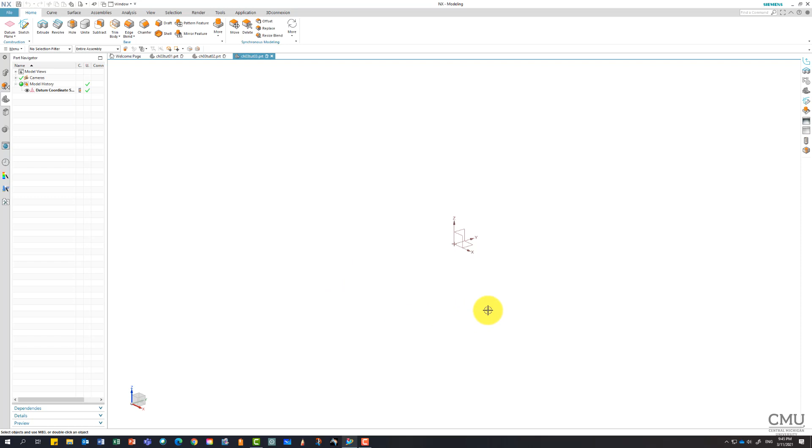According to the book, this looks like a chess piece, so we need to do a different operation. Extrusion is definitely not what we need. This time we're going to use revolve. We're going to make a sketch and rotate it based on an axis. So either using the XZ plane or YZ plane, you can make a sketch, then you'll be able to revolve it.

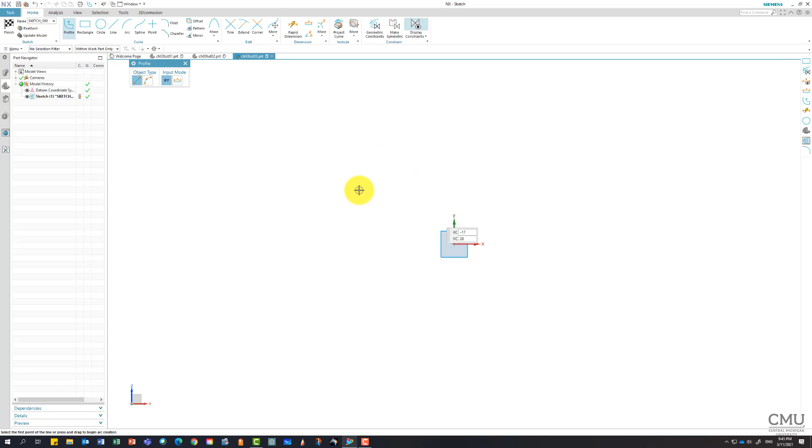Let me use the XZ plane for the sketch. There you go. I'm going to use the center as the sketch origin. Once I finish it, then I'm going to revolve it. The overall diameter is 120, so I need to go around 60. So always think about the diameter, but we're going to work on the radius in the profile.

Let me zoom in a little bit so I can get more detail, and I'm panning a little bit. Alright, starting from there, then I'm going to go around 60.

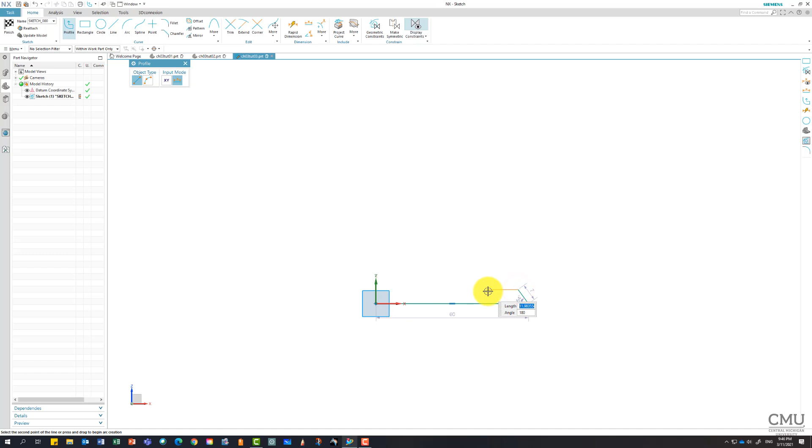There we go, then a little bit of a diagonal line, a little bit of a horizontal line. Again, just work it out over, get the overall shape. It kind of works out, but try not to have unintentional constraints.

So now line it up, then come back. So I got the overall shape. Obviously this is not exactly what we needed.

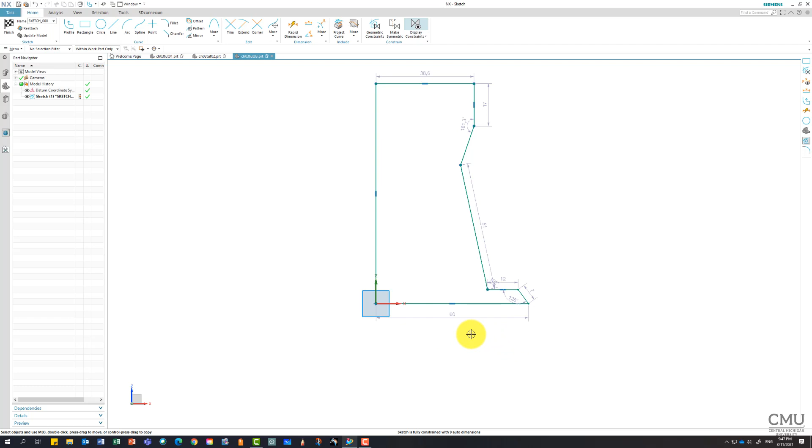So I'm going to start adding some more dimensions or constraints. Let's start thinking about some constraints we need. Actually there's not much going on. So we have a horizontal, vertical - besides that, most of them should be done by dimensions. That's pretty much it.

Let's start with the dimensions then. Our dimensions are from the center. Let me change it to inferred so that I can pick up an object and automatically find the best dimension to fit it into.

I'm going to start with the bottom, all the way going up. So 120 diameter here, so obviously they need to be 60. So from there to there, it's got to be 60. Can confirm 60, enter, it's confirmed.

Another one is 80 in diameter, so from there to there needs to be 40. From there to there, as 40, confirm 40, enter.

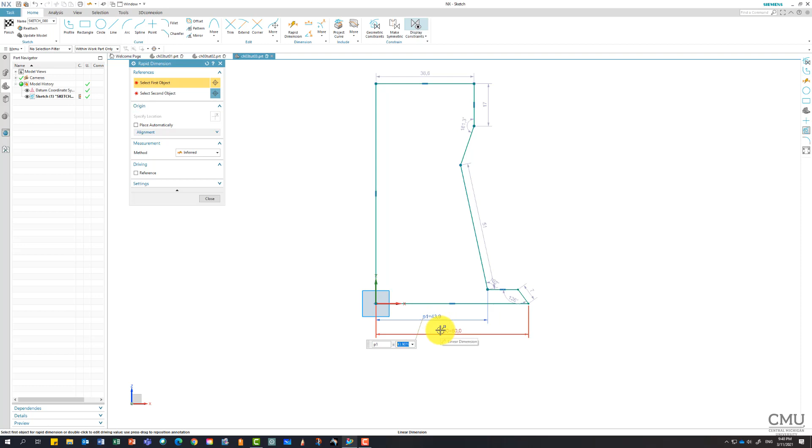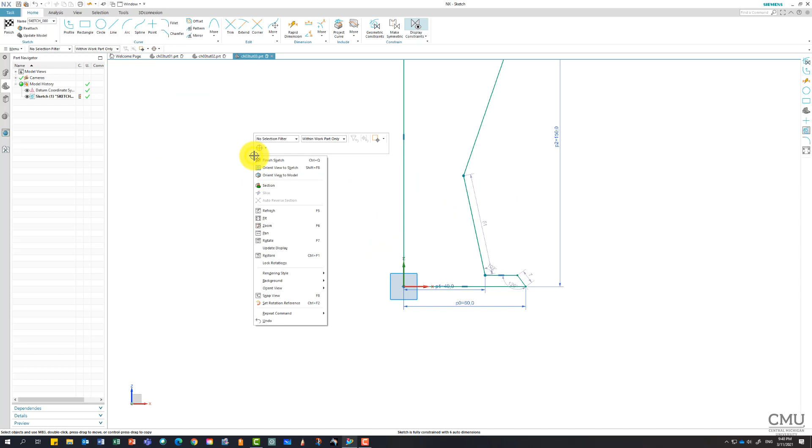Then I need the overall length. Let me zoom out a little bit. From there to there is 150. Oh, way too short, so I'm going to have 150, enter. Alright, it went out of the window, so I'm going to right click and have a fit so I can see everything.

So now I need this 35 for this dimension. This one's supposed to be 35 - no, 30, I'm sorry, is it 30? 35, I'm sorry, 35. There we go, looks better. So continue adding.

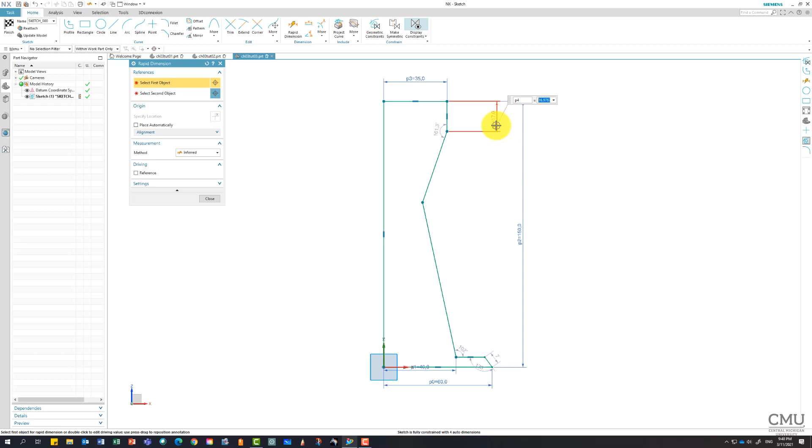So this one, according to the book, is supposed to be 40. And I need a vertical distance. Actually, you can - this one does pretty good, the inferred one, doing pretty much good.

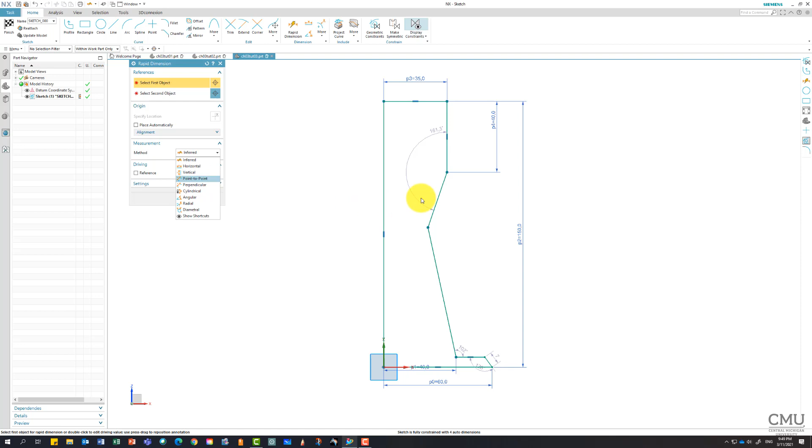But if you want to really try to avoid any mistake, you can actually confirm what type of dimension it will be. In this case, I'm looking for the vertical dimension of this portion, so I'm going to force it to be vertical. Then if you pick any curve, it will try to get the vertical distance.

Okay, let me try again - accidentally I picked up the middle point. I try to be vertical from there to there. Then you can see no matter what you try, it's going to be vertical from now on.

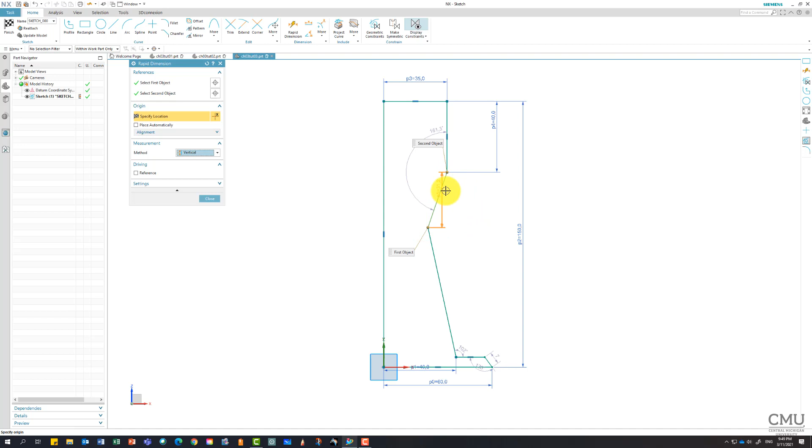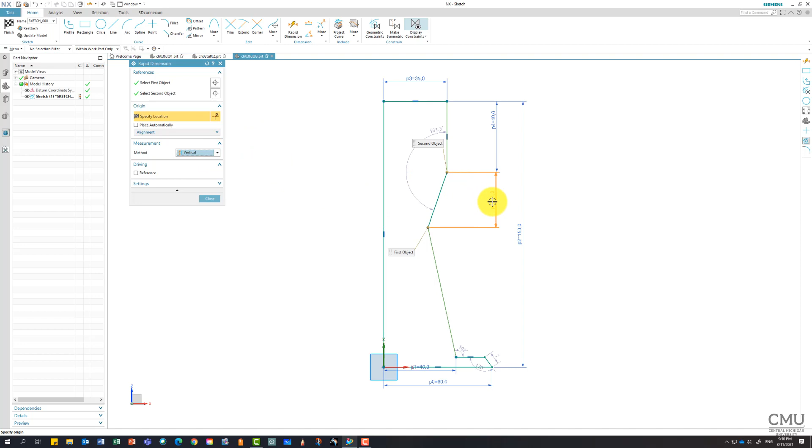So if I don't do this, if I try using just the inferred one by clicking this, again depending on your mouse position, sometimes it goes the true length or horizontal, or sometimes you get unintentional dimensions coming out. That's why I can force it to be what it's supposed to be, so I can get only vertical. So according to the book, I need a 30. Enter.

Okay, what else do we need? I need a 12 millimeter from there to there. And I need anything else? 77 degree from here to there, the internal angle.

Well, obviously the other way we can go it. So click this and click this. Again, what I need is not vertical. I forgot to change, so it's angle dimensions.

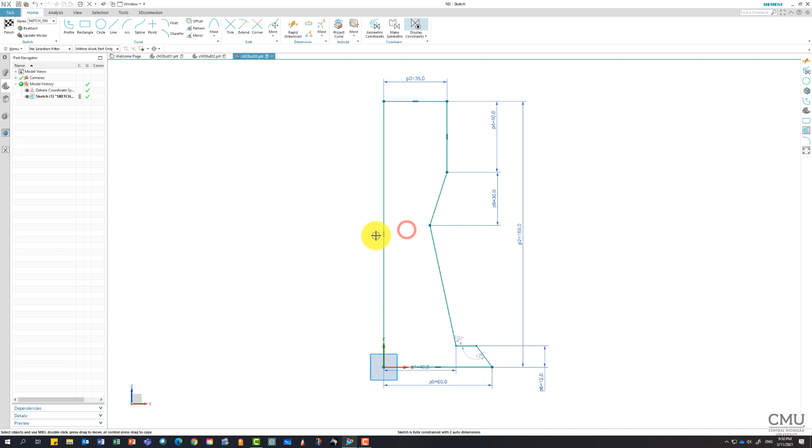Again, I didn't need it, let me delete it, it made over constraint. Dimensions, I need angle between this and this. So this is 77 according to the book.

There we go. I need 77, 117, I'm sorry, from there to there as 117. So I'm gonna click here to there so that I can get 117. Depending on where your mouse point goes, it gives all quadrant angles you can come with it.

So actually I'm looking for this one, supposed to be 117 this way. Okay.

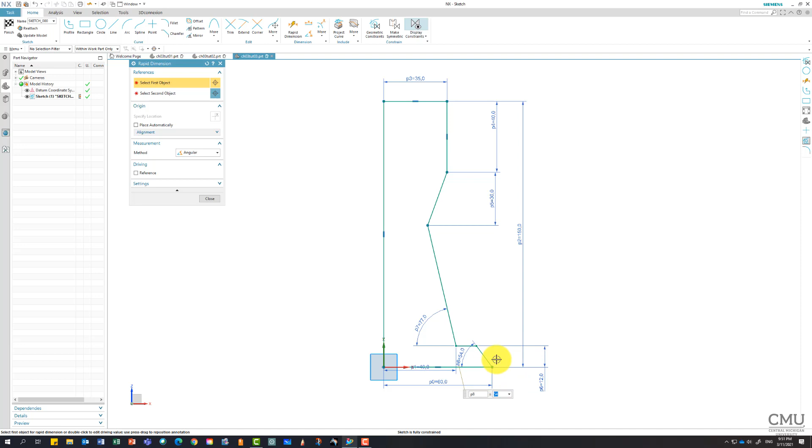How about this? Let me give up, delete. I will try to get a real 117 here. So again, still you can do it.

180 minus 117 becoming this the angle. I can just try this way so that I can get the precise 117 degree right there.

Perfect, so as you can see, it's already done. The sketch is already fully constrained. I don't need to worry about adding more constraints like coincident or point on curve. I don't need it, actually it's already done deal. So the sketch is fully constrained. That's what you want.

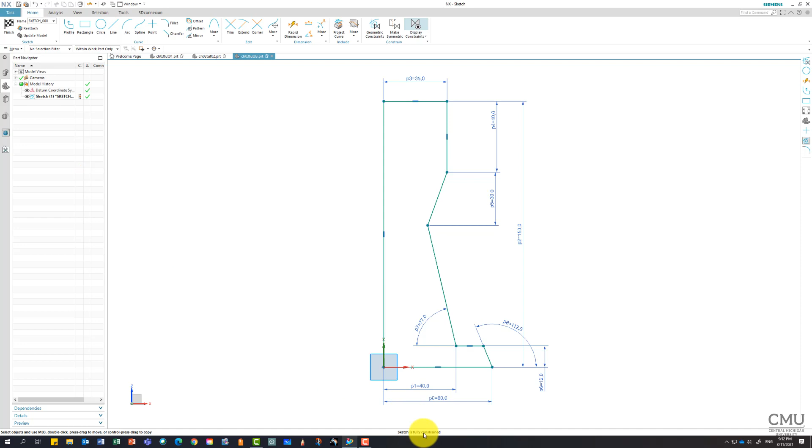Finish. Again, this time we're not doing extrusion. Okay, we're not doing this. We're doing revolve. Once revolve is selected, it's asking you to pick up the curve.

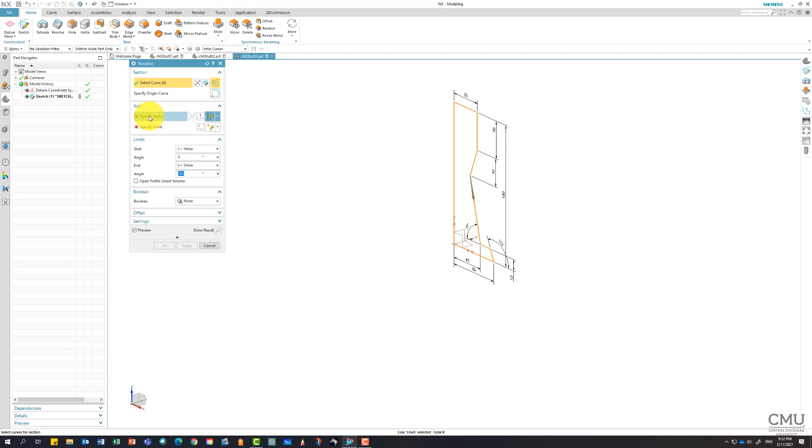So pick up the curve. Then it's asking you to specify the vector, the angle you want to use. So I'm going to use specify vector and click the line I want to use as an angle. Then usually, if you include the sketch origin as a part of the line, you already figured it out.

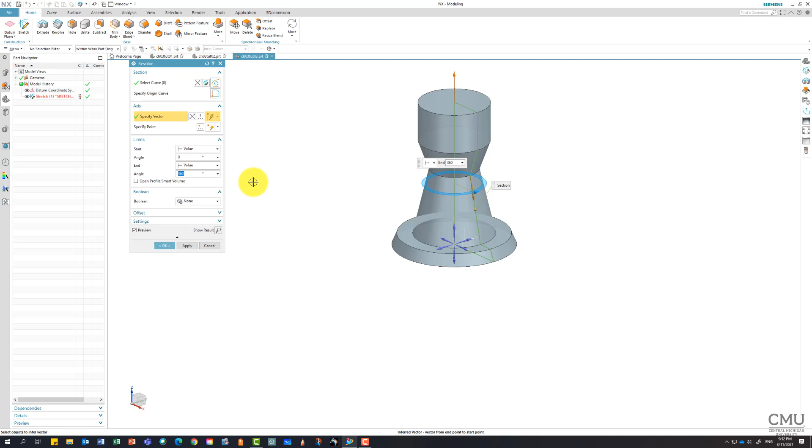Then it asks you how much revolve you want to do. So from 0 degree to 360 degrees for full rotation, right? Not much worry about it. Say okay, then the solid piece is already there, right?

So again, the home key will give you the perfect trimetric view. Oh, one more hint, or instead of hint, I would say it's tips. If you're bothered by this, the datum coordinate system symbol, and also this blue line which is representing the sketch...

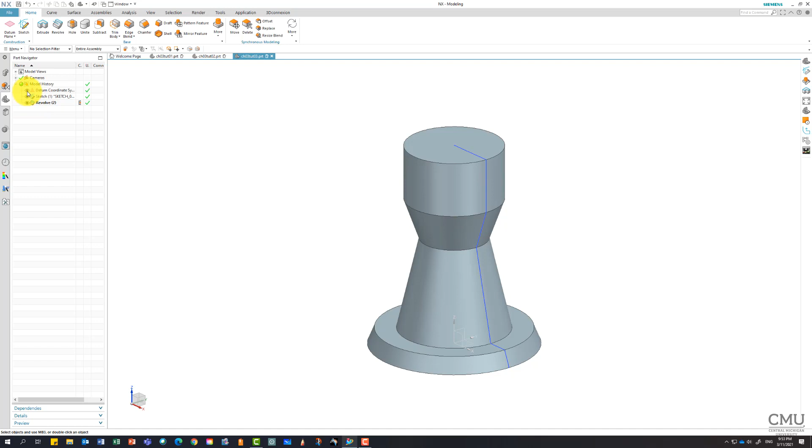If it is bothering you, can you see that there's an eyeball? By clicking that eyeball, you can hide it, right? Then hide the datum coordinate system too if you don't want it. That's how you can do it very quickly, right?

So then later, if you need access, you just simply double click, then it automatically brings you back to the sketch. If you need to modify it, you can. Then once you finish, it will bring it back. Then that's it, pretty much straightforward.

All right, it's not bad, right? So again, as long as you made the sketch fully constrained, doing either extrusions or revolve is not hard at all. All right, try it. Remember, the key point is making the sketch fully constrained, not under constraint.

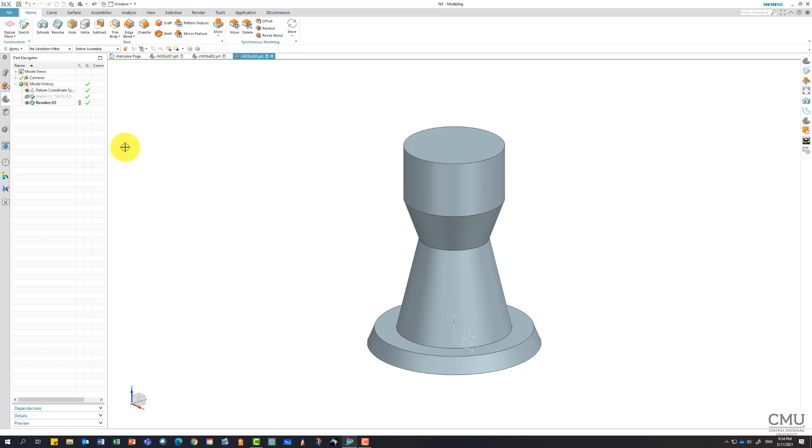That means there are a bunch of auto dimensions there, or the over constraint. That means the constraints, geometrical constraints you edited, dimensions you edited, they conflict with each other. So that's another thing we try to avoid as much as possible in the sketch, right? That's the main things of chapter 3.